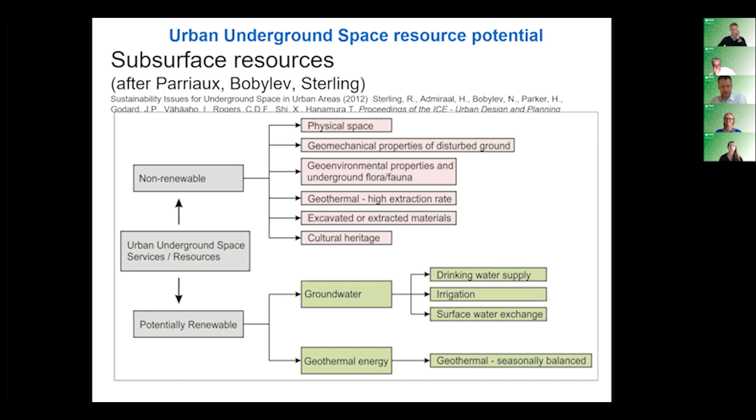I think this is a famous diagram, first developed by Aurèle Parriaux, but then we added something. This is basically addressing our first theme: underground space as a resource. Here resources are listed, and they have different degrees of renewability. This is what is hot on the agenda.

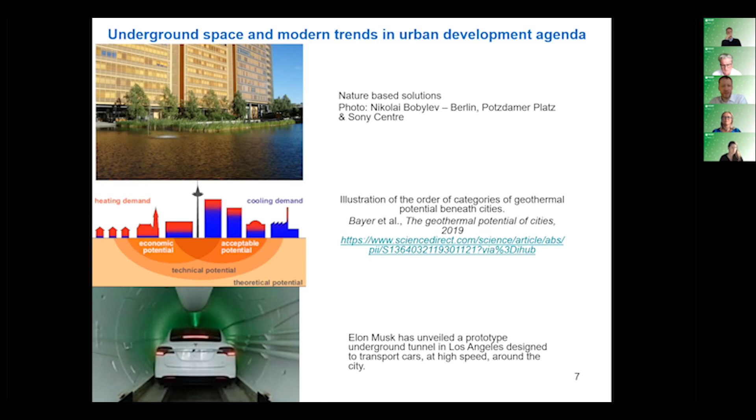So this is an important issue, as well as groundwater. And at the bottom, Elon Musk offers us some pioneering solutions. So we also need to think that technology and innovations will be such that more use of underground space will be required. So how can we do it?

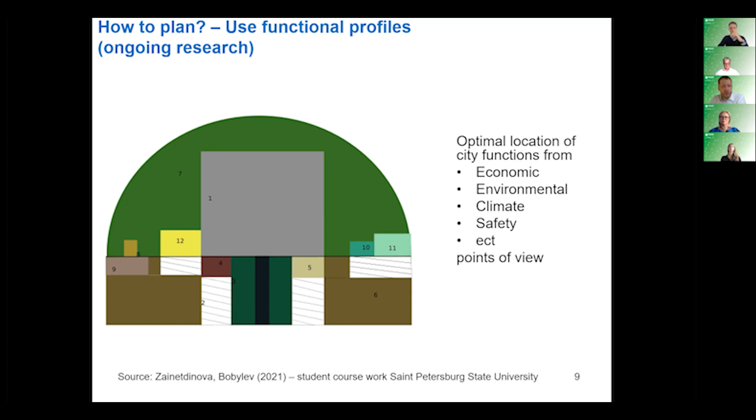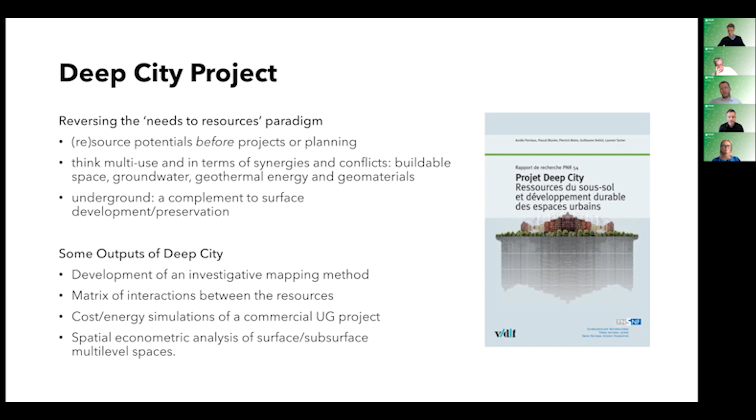I'm going to talk a bit more about this investigative mapping method, which was an important part of my dissertation. We were working with existing data, and this is an example from one of my case studies, the city of Dakar in Senegal. We met with local planners, geologists and geotechnical engineers to collect data on four resources.

We wanted to understand their potential for construction based on geotechnical properties, their use in local markets as building or infill materials, the existence of aquifers and groundwater, of which Dakar has an important one, and geothermal energy. You might ask, Dakar, Africa, why geothermal? But it's actually for geocooling systems, for which there's potential.

So to reverse the thermal flow. We also added to that, because the urbanization of Dakar has gone on for well over a century, an interest in seeing how certain centralities in the city worked, since our results showed it was more advantageous to situate

underground development in highly central spaces, at least for commercial spaces. We wanted to see how centrality itself could be a potential, even though centrality can be bad as well as good. For instance, water treatment plants placed underground probably shouldn't be in very central places; they should be somewhat peripheral. These are the kinds of questions we hand over to the planning

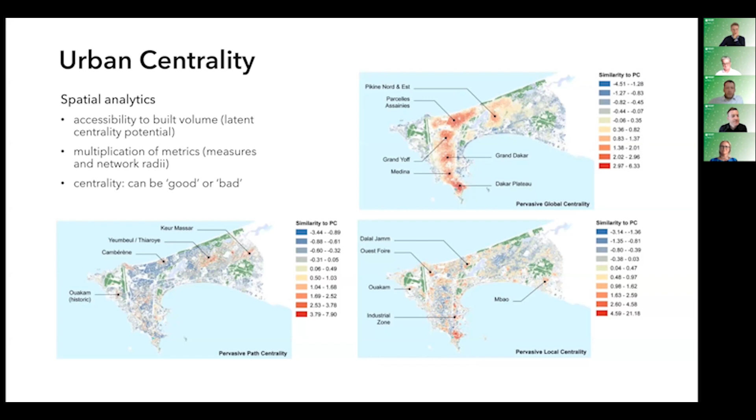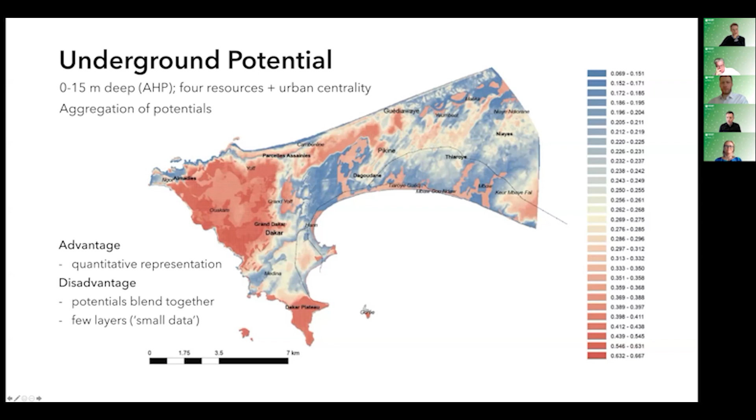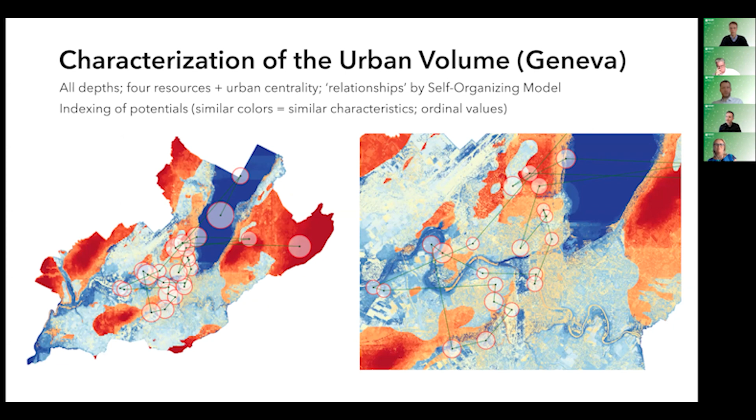So in thinking of this multi-dimensional city, in terms of thinking through the underground as a very important series of dimensions that one will bring to planning, so to think of this urban data as a kind of form of heritage, one that we can gather and that we can try to document and also render publicly available.

So my recommendation would be we need to try to digitize as much as possible, to keep these things also aware to the public, to try to organize the data in a generic form with unique identifiers for cross comparison, or at least with similar geographic projections for easy overlay.

And to think also of this urban data as a kind of commons, as a sort of part of the public space of the city, which belongs to everyone by belonging to no one, and to keep it as open access as much as possible.

We don't propose putting demographic fields into this kind of algorithmic setup, so it's not about who lives where. This is something that can be added in a different way and would require certain ethical codes. This should be raw data and not PDF formats.

And this also has an impact for education, but as well entrepreneurship, to figure out how we can get both the education community and the entrepreneur community building applications and innovating with regard to the data that would be part of this data commons.

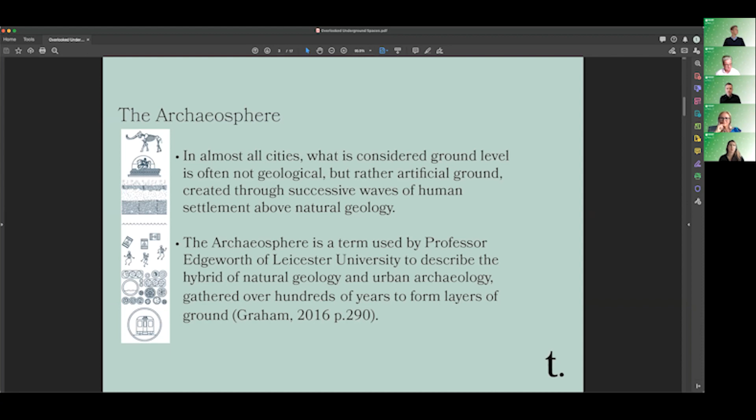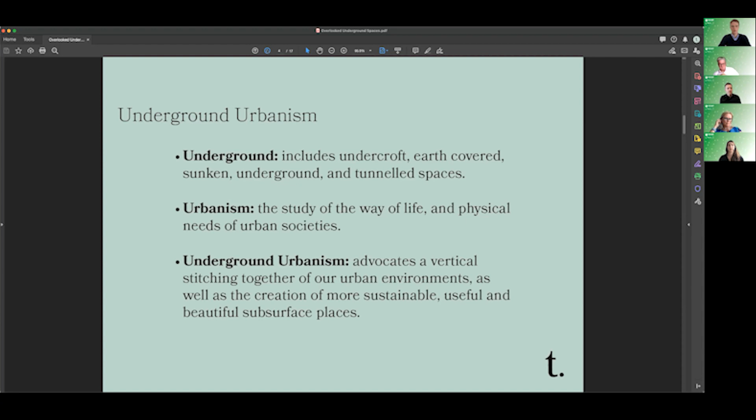So if we think about underground urbanism, I really see it as including not just those things physically below ground, but also the spaces that are undercroft. If we think of flyovers and motorways, you create an almost underground space within a city that shares many of the same attributes. Urbanism is the study of the way of life and the physical needs of urban societies. So I believe underground urbanism, which is the title of my book, is really about how we stitch together these different dimensions of our cities, as Michael and Nikolai and others have said, so they become more coherent, more functional, and more enjoyable.

I think the best place to start with this topic is to think about the big picture. What does it mean to you and your city? What's your city seeking to achieve? And how can the subsurface either hinder or enable that vision? Have you got a city that's actually sinking due to groundwater and subsidence issues? Are you looking to electrify to cope with all the new electric vehicles or IoT that needs that infrastructure and energy — in which case, what's happening in the shallow subsurface of your city?

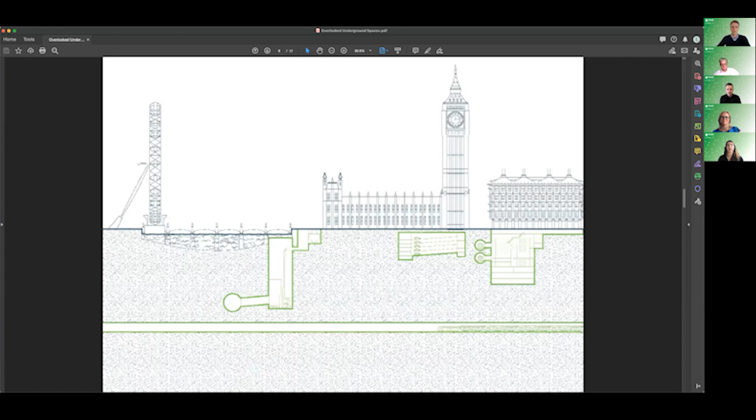I'm going to just have a couple of slides on London quickly, a couple of the overlooked spaces that exist here. Apologies for the resolution on this image, but a bit of a snapshot of Big Ben here in London. What we don't see is the new super sewer that is almost completed construction, the car parks, of course the famous London Underground, and all these things that exist on the flip side of our cities that keep them ticking over. We're close to about 9 million people now in London.

Although we actively use the subsurface, as Nikolai said, we don't have any planning system in place for proactively dealing with this as a precious resource. So although London has good geological conditions, for example, for constructing new train tunnels, we're running out of physically good geology and areas that aren't obstructed by building foundations. It's a little like a Swiss cheese underneath the city, with all these building foundations coming down that new infrastructure has to weave throughout, and that becomes more and more difficult.

But there's some really good adaptive reuse projects that are leapfrogging ahead of policy and happening anyway. I think that's what happens when you're in a big, fast-paced, innovative and expensive city. People seek out spaces that are undervalued and underused.

This is an air raid shelter beneath an inner London suburb. It sits 33 metres below ground. It's had a few incarnations over the years, but was built originally during World War II for residents to shelter during bombing raids. In recent years, it's turned into growing underground, a hydroponic farm which produces microgreens for sale in restaurants and supermarkets around London, and they'll soon be expanding onto their second site. This started as a test project, but is growing and is quite an innovative use of an otherwise heavily compromised and difficult space below ground. It works with the benefit of the humidity, the stable temperature, and the proximity to the city centre.

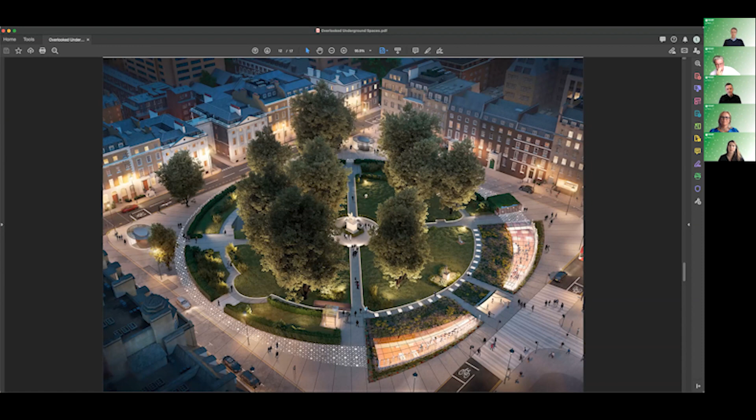This is a recently consented scheme in central London to turn an underground car park - this is the ramp down - into a mixed-use subsurface development that sits below an existing park. It may well have a day spa, or retail or office uses in it. This would be quite an innovative use of a currently underutilized space in central London, and it has approval, but I'm not sure whether or not it will get constructed.

I'm part of a group, as well as ISOCARP and ITACUS, called Think Deep UK, and Han and Antonia may wish to speak afterwards about their national action plan through the ITA. We're essentially a voluntary, multidisciplinary group who want to advocate for the better use of the subsurface. We have architects, engineers, planners, geologists, lawyers - quite a diverse range - and we're all trying to tackle this issue from our own unique perspective. I'd encourage people interested in this topic to see if there's an equivalent group in their city or country, because they are growing. It's a really great way of tackling this complex, slightly under-acknowledged area from multiple perspectives by working with different disciplines. We've so far had one workshop on planning the subsurface of our cities, one on design, one on transport, and one on social value, and all of those are available on the website tduk.org.

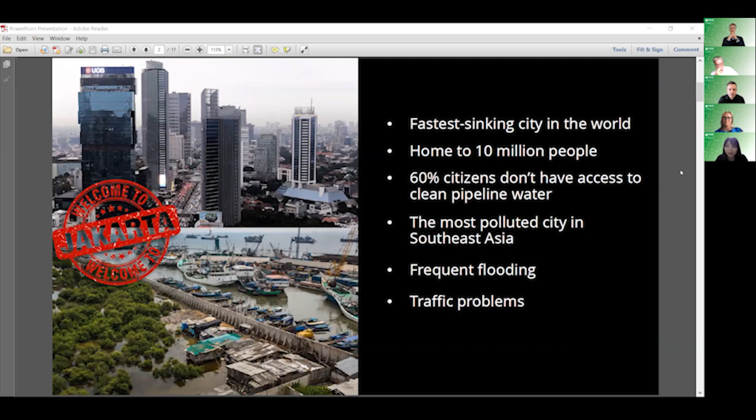Welcome to Jakarta. Here are some facts about the capital city of Indonesia that I'm highlighting today. Jakarta is the fastest sinking city in the world and the most polluted city in Southeast Asia, with frequent flooding and traffic problems. Among 10 million people who live there, 60% don't have access to clean pipeline water, so they tap the groundwater, which caused the city to sink.

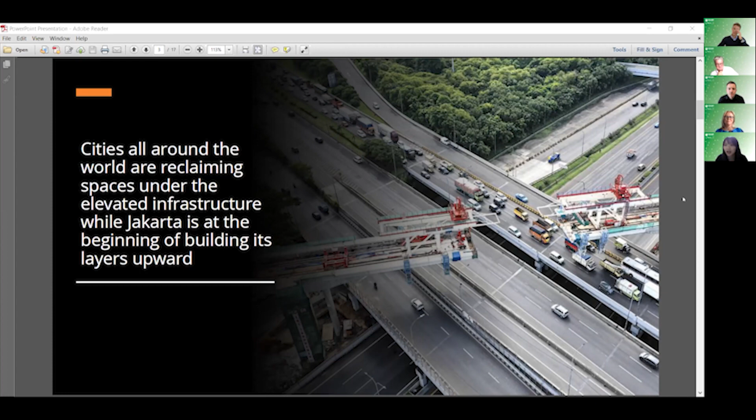Just like other cities in developing countries in Asia, Jakarta is planned to be built upward and also downward. When urban designers in many cities around the world are reclaiming and reinventing spaces under elevated infrastructure, Jakarta is still pretty much at the beginning of adding layers to the city, like elevated highways, elevated toll roads, and also rail lines.

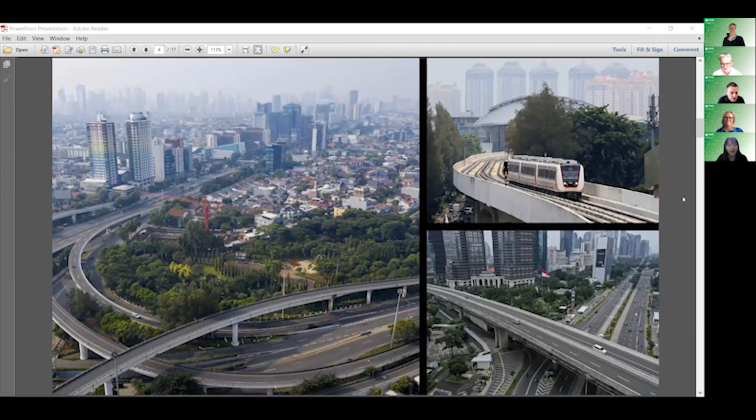Paris, London, and New York, just like Les mentioned before, cities planning and design are focusing on the move to revitalize the unused underground spaces.

But here in Jakarta, a 34-year dream of the country finally becomes a reality when it starts digging the ground in 2013, which then opened the first Indonesia underground rail network in 2019, with the hope to finally overcome traffic gridlock in the city.

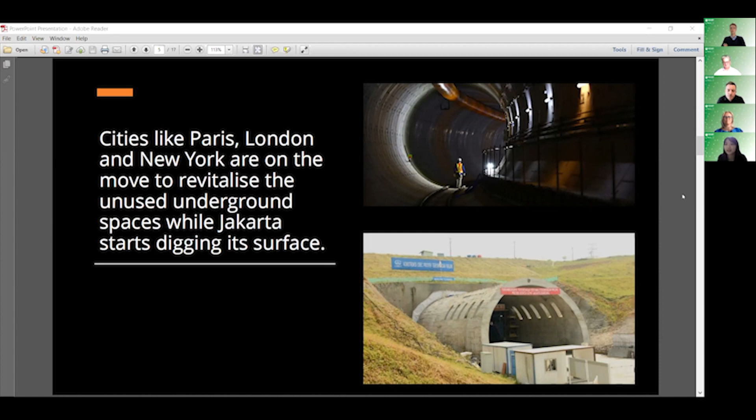But soon after that, many questions were raised upon Jakarta's determination to build both up and down. Questions like: is Jakarta heading towards the right way? Is elevated infrastructure benefiting the community? Or is underground infrastructure actually safe from flooding and earthquake?

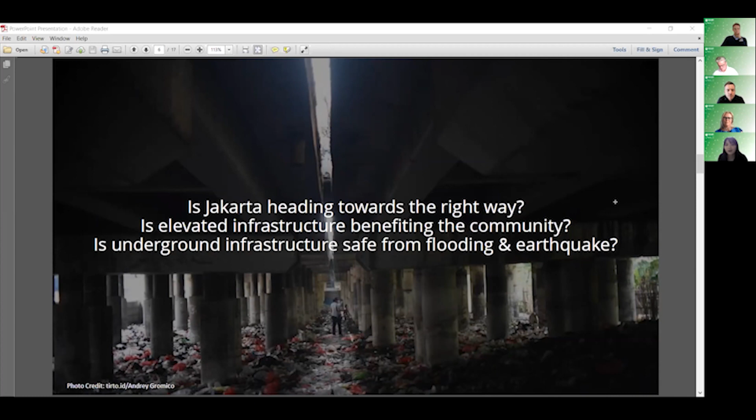Because as we can see, the spaces beneath elevated infrastructures in Jakarta right now are like dark and dusty corridors of neglect. They are home for the slums, filled with trash, and quite noisy due to traffic running above. It's such a waste when spaces under the elevated like this are not designed for the people, because these spaces should not just become structures that support the infrastructure, but should also be an added value for the community and bring aesthetic qualities into the urban fabric.

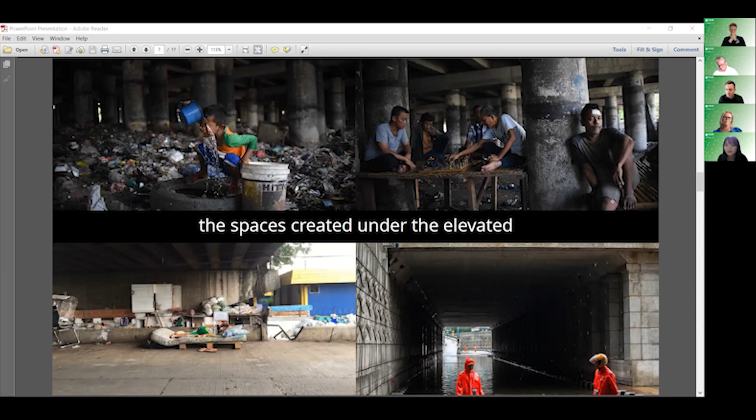So now I will bring you to take a look at some examples of how cities all over the world manage to reinvent their underneath layers.

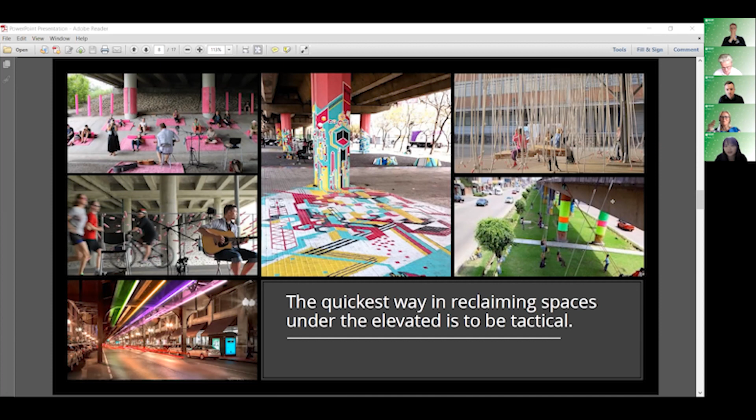The easiest and fastest method to reclaim spaces under the elevated is to do some tactical intervention, low budget and easy to do, like creating interesting venues, lighting installation, urban play installation, even graffiti, anything that invites community activities to take place. Another one is this pilot project, spanning nearly half a mile in length, through the middle of downtown Boston.

This project aims to revitalize spaces under the viaduct by creating a green infrastructure integrated with public open space.

And this one is in Hong Kong, and I think this one is very interesting because it's very related to Jakarta's situation right now. This is a 7,000 square meter pet garden that was built on top of the drainage tunnel and beneath the elevated highway, so it's in the mid layer of the elevated and the underground.

This garden serves the multi-purpose of flood prevention, transportation, and recreation at the same time. Also, to preserve water resources, the rainwater collected in the tunnel will be used for irrigation and general cleansing within the garden.

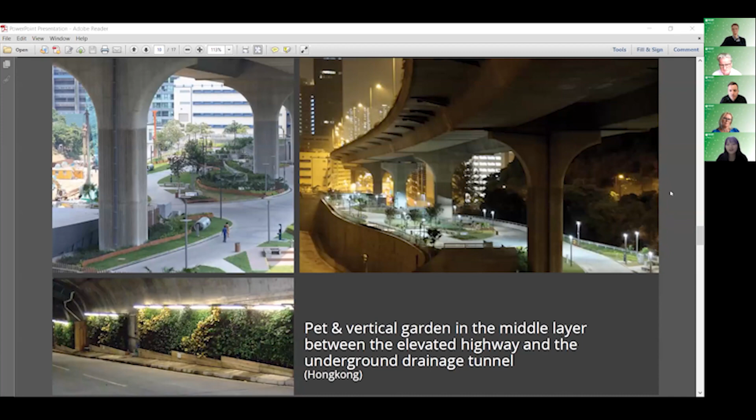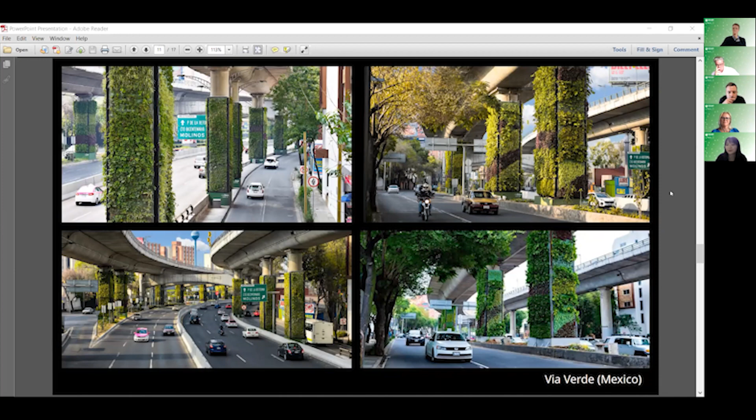Another example is from Mexico, a very easy tactical intervention to design friendlier and healthier spaces, and also responding to climate change by putting a vertical garden with a rain harvesting system.

And this one is in Japan. It's very interesting because this is an effort to improve the space under the elevated railway by creating something like a mall, but more open, more vibrant, and more welcoming than the conventional mall.

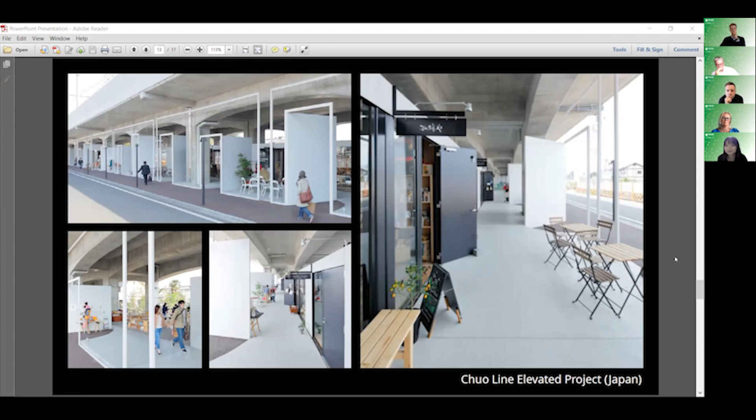The same thing also happens in Mumbai, which is very close to Jakarta's context. The spaces under the flyover were reinvented to be a public park with playground and jogging track, also reducing crimes in the city.

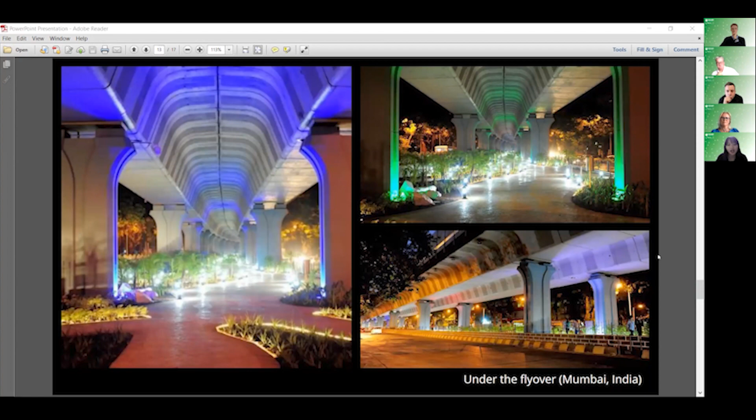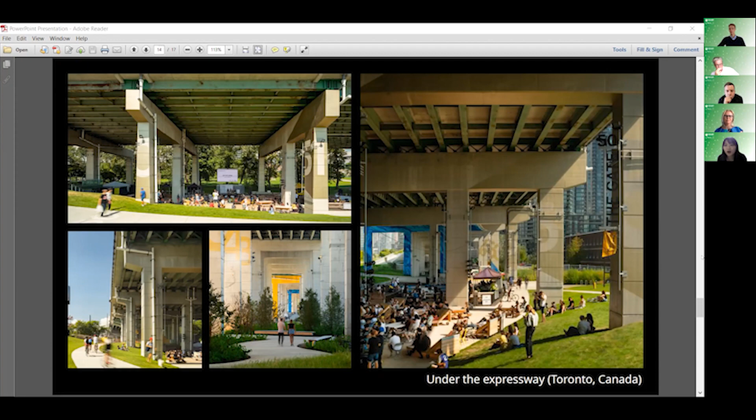To keep it short, after all those examples, I'm going to focus on design intervention, since I was working in the planning and design sections. In a nutshell, there are three strategic design interventions to reinvent and activate spaces under the elevated.

For Jakarta's context, it's more like we're just at the beginning. So the first one is community-led design, to make sure that we understand the social and economic context of the city, of the place. And the next one is actually to optimize the mid-layer.

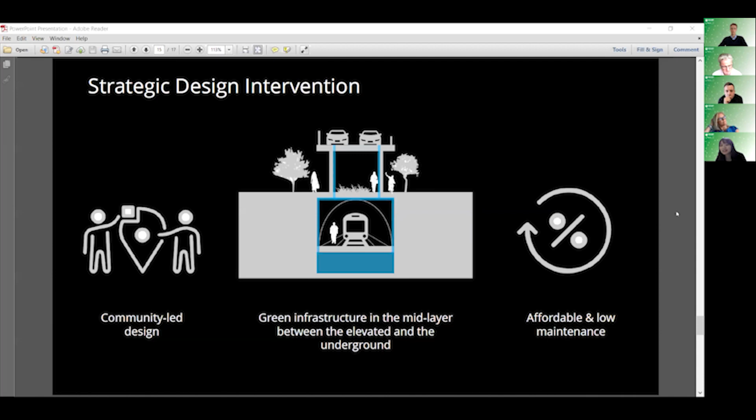What I'm calling the mid-layer is actually at the ground level between the elevated and the underground infrastructure, to be used for integrated public spaces and green infrastructure. Last but not least is to make sure that solutions for the spaces can be affordable and low maintenance, so it will be very doable for the government.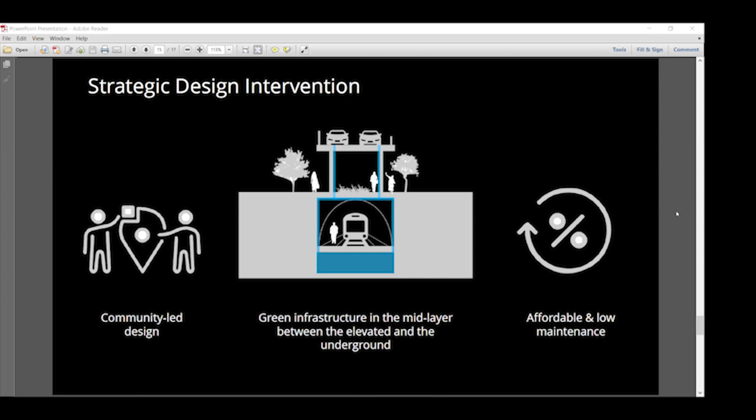At the implementation level, there are 5 recommended key moves in reinventing and activating the underneath spaces. Starting from the first process: mapping the areas beneath elevated structures and underground spaces that we just started to build. Then study and analysis of each space, leading to a focus group discussion to engage the existing community in the next step, which is planning and design of the new public space, down to the final step of course, financing.

So in conclusion, while Jakarta is still quite at the beginning to build both up and down, it is very important to start by designing spaces on the ground level under the elevated structures for the people. Because especially in this era of the pandemic, a healthy public open space becomes such a vital need for cities all around the world.

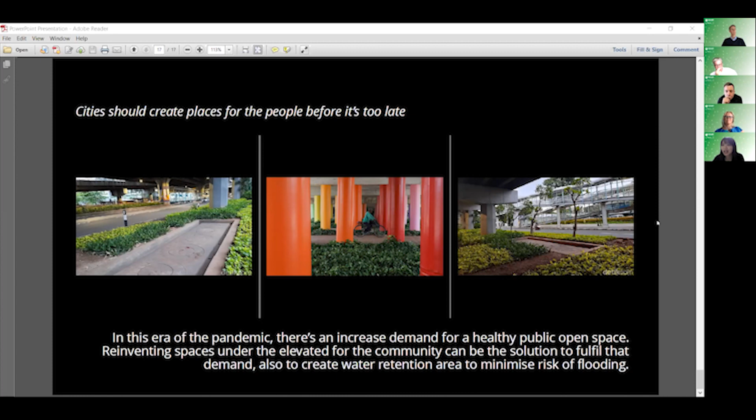So yeah, that's me, I think, yeah.

Thanks so much, Felicia. I think that was really insightful to see these neglected spaces in Jakarta and the vision of the city, and probably your own efforts in beautifying those and making them accessible for the general public. And I think Liz has also shown that underground infrastructures originally built for other uses have now been transformed, and have the potential to be transformed, to really serve people in the city for recreation, for instance.

So any questions from the audience for Felicia or Liz, please?

Yeah, we have one question for Liz, which basically says that the current underground uses have been based around services like parking, transit, etc. I would like to know what could be done to change the perception of these spaces to include uses like shared spaces, commercial and retail spaces. Liz, would you like to take that question?

Yeah, sure. I think the best way of changing perceptions is just to get on in there and do it, which is, of course, easier said than done. But the easiest way for people to think differently about some of these spaces is to see them enlivened, brightened and converted—then all of a sudden it seems possible. Whether that's through a small demonstrator test project or temporary interventions like the ones Felicia spoke about, I think they all help.

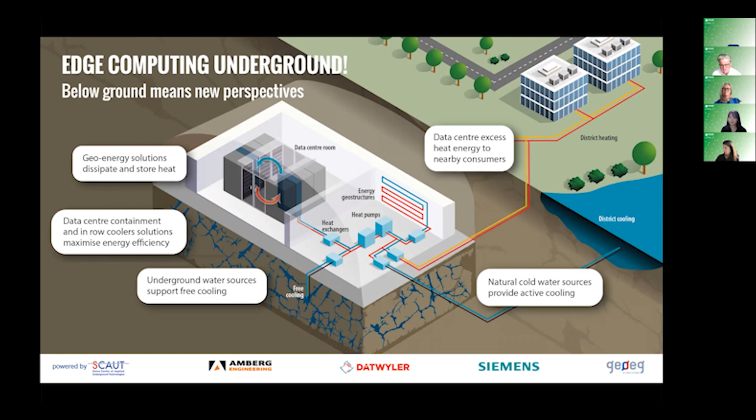Our joint venture, consisting of the companies Amberg Engineering, Datwyler, Siemens, and Geoeg, is currently operating an underground edge data center in a real tunnel cavern environment in the Hagerbach Test Gallery. On one hand, this serves future technical development and the analysis of various environmental factors. But on the other hand, and I think that's also very important, it offers the ideal demo environment to present the concept to interested stakeholders and to provide a touch and feel environment. If you want to learn more about this concept, please visit our website at edgecomputingunderground.com.

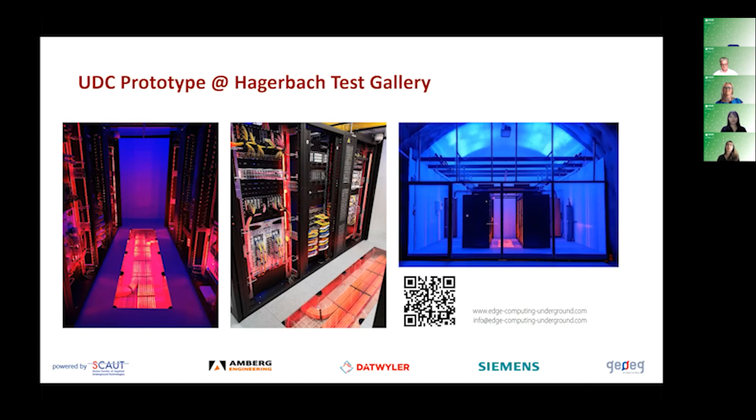Among others, there are constant climate conditions with no hail, no droughts, and so on. Plus, it is possible to produce in urban areas, and that's exactly where we have the demand, which leads us to cut all the transport and supply chains we see today. To bring the proof of concept, we have developed and commissioned an underground green farming prototype at Hagerbach Test Gallery.

We are working on the concept of aquaponics - a combination of aquaculture, growing fish, and hydroponics. The charming way is that this system runs in a cycle: the excrements of the fish are directly fed as a source of nutrition for the plants, and the plants take the nutrition, clean the water, and the water then goes back to the fish. By that, you can save up to 95% of the water, or keep it in the loop.

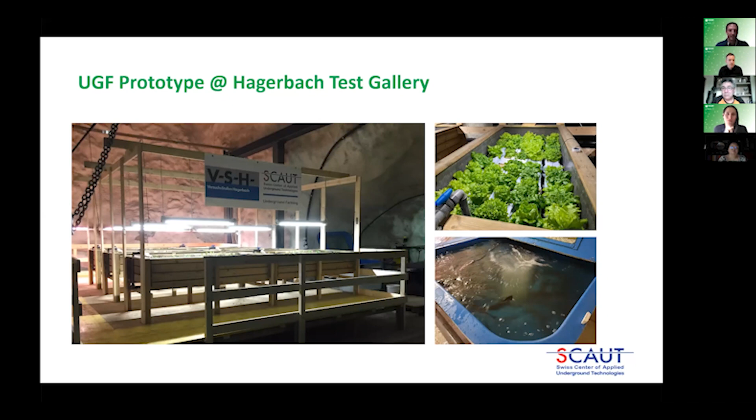We have been working on this project since 2019. We've also received the ITA award for the Underground Concept of the Year. As you can see, the fish has grown very well - we've also consumed and tasted them on site. The plant growth was also successful, so we can say the proof of concept is done. With this, I would like to close my short talk, and I'm happy to receive your questions if there are any. Thank you very much.

Thanks so much, Klaus. I also want to add that ITACUS, the ITA Committee of Underground Space, has partnered up with SCAUT as our industrial partner, because we want to really show the world what is possible underground. So you've seen harvesting energy instead of wasting it and wasting space above ground, housing a data center efficiently in the underground space and consuming less energy in the process - that's one way. And then producing food for populations in the future, like we've seen in the example of Liz, or here in the example of Switzerland.

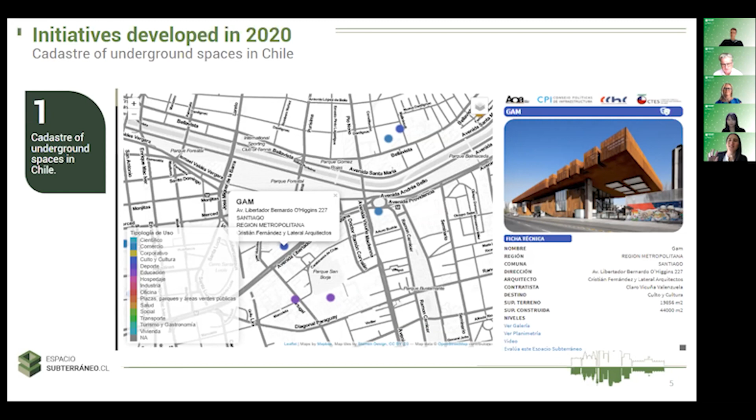About the first one: given the need to demonstrate success stories and learn about the development of underground spaces, this initiative was established to raise and disseminate information on the most emblematic underground spaces that exist in Chile, through formats of technical files accessible from a free access computer platform. We have been working about 7 months with a collaborative work methodology to collect the data.

You can see in this screenshot of the platform that we have different color dots according to the use or destination, if it is commercial, educational, cultural, among others. This dot also shows the exact location of the project. At your right, a banner with technical information. You can also see a photo, a planimetry, and we have a banner on your left with indicators and statistics and more information about this geo-reference platform.

We have 3 categories of basic information we call the fundamental fields. These are data of a primary nature focused on knowing the actors involved in design and construction, as well as statistics like year, destination, use, and accessibility, among others. We also have the complementary fields, which are secondary data that seek to provide relevant information or highlights of the project. We also have annexes, for example a photo gallery, planimetry, and videos, among others.

With this information, we raise indicators on the development of these spaces. Now I'm going to present some preliminary indicators. This week we included international cases, and we have 10, all in Europe, and 114 cases in Chile, 20 of them in regions outside the capital, Santiago. The predominant type of use is worship and culture, and in second place, commercial cases.

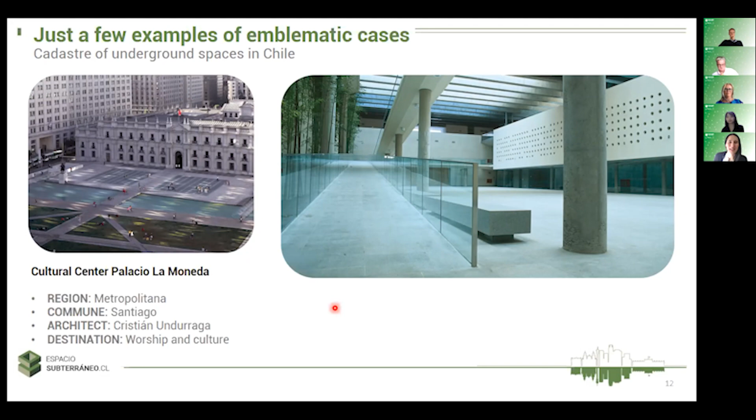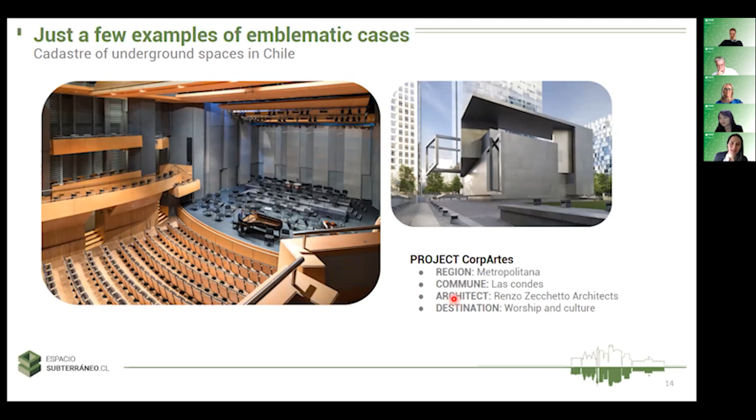About the second initiative: in 2020, a diagnosis of gaps and regulations regarding the underground space was carried out, where interviews were conducted with key industry players related to planning, design, and construction of these underground spaces — for example academics, construction companies, engineers, architects, designers, clients, and constructors. We have already worked for 5 months, and finally, as a general conclusion, a summary matrix is made with the counts of gaps most addressed during these interviews.

This proposal seeks to generate a line of action regarding a series of initiatives facing the main challenge identified: the development of a multidisciplinary vision by the actors involved in the life cycle of an underground project — the same gaps that ITA and ITACUS have found. So we need really brilliant planning to solve the problems of cities growing faster, and we need to be efficient and effective during the life cycle of our projects.

So in February of this year, the final report of the project conclusions was delivered to a technical working group, which seeks to establish a proposal of actions to correct the gaps.

So this is some of the initiatives we worked on in 2020, and we hope to keep working on them this year. We hope to activate four more initiatives in 2021.